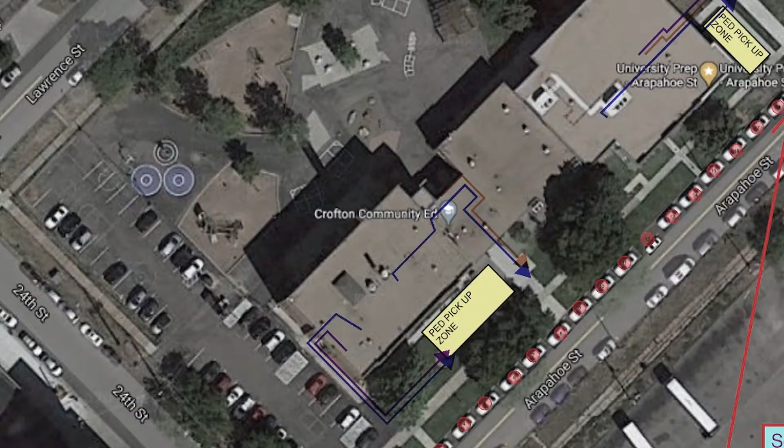I, along with my colleagues John and Adam, participated in Autodesk's 4-part webinar series designed for safety following COVID-19. Session 3, Analysis Focus. In this video, we will cover how we became involved with a local school in trying to help them reopen, what kind of data they typically have available for us to use, what tools we use to evaluate classroom capacity and COVID-19 safe routing, and how we analyzed our design results with Autodesk InfraWorks Mobility Simulations.

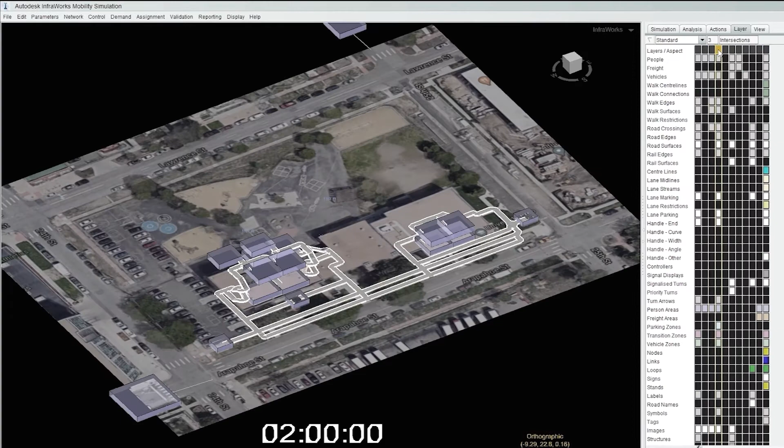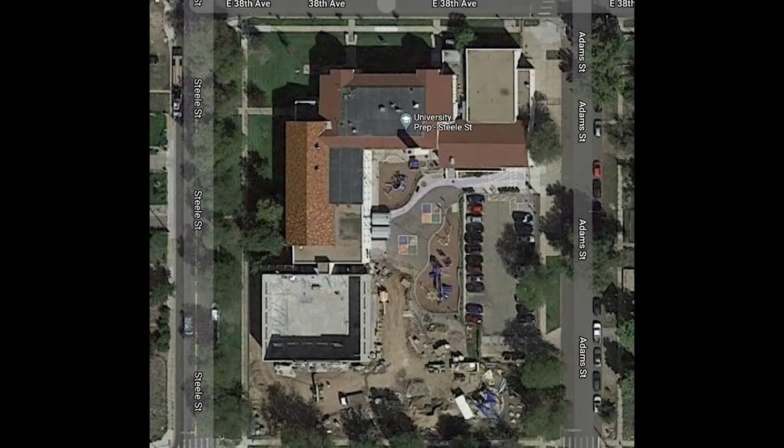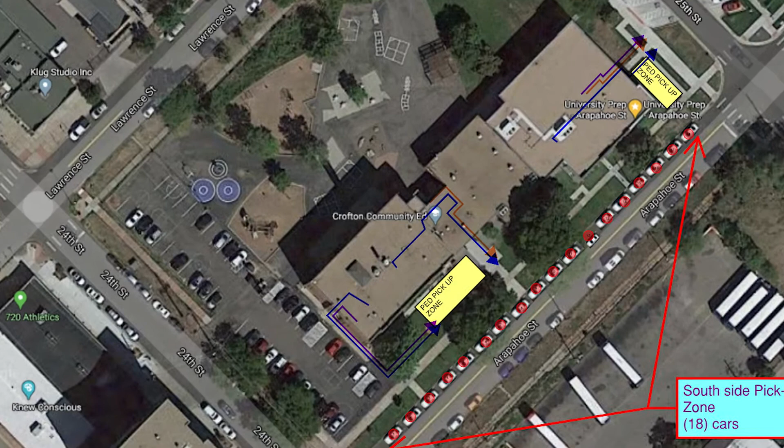VAplus got involved with UPrep out of need, based upon the fact that I'm a parent of a scholar at this elementary school, and quickly recognized that if we did eventually go to in-person with the new COVID social distancing and all the other things in the news, it was going to make dismissals very difficult, and it seemed like it was going to be a little bit of a logistic nightmare. And so I reached out while getting supplies to do virtual, online learning for my son.

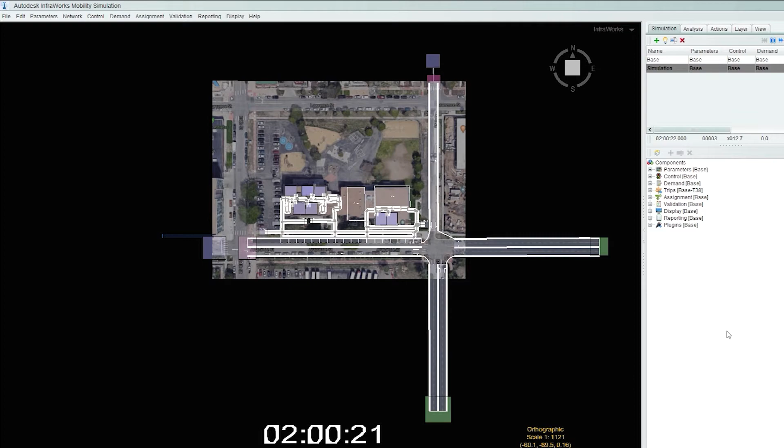I reached out to Alistair, the chief operating officer at UPrep, and requested a meeting with him to go through some of the stuff that we thought we'd be able to do. We had just been introduced to InfraWorks and Mobility Simulation, and it felt like it would be a great way to take some of our other COVID social distancing tools that we had developed and be able to prove and demonstrate that the solutions were workable and fine-tune stuff without experimenting on students.

We quickly ran into some interesting challenges to overcome. A few of them being that there were a bunch of different transportation modes to take on. They have buses that had a very limited window. They had pedestrian pickups, and they also had car pickups. And at the Steele Street campus, they had an additional one beyond the Arapahoe campus: they have students that are released and just walk home. So we've got a bunch of different modes to take care of.

They also have limited staff to watch the kids in class, as well as watch for parents coming up to pick up their kids. So they have to walkie-talkie, communicate back and forth. So they couldn't have too many points of entry or dismissal because they wouldn't have enough staff to cover that. Also, just being able to maintain cohort separations. In Colorado, they're doing cohorts where in the elementary schools, they're essentially not mixing these small groups of students to be able to contain outbreaks.

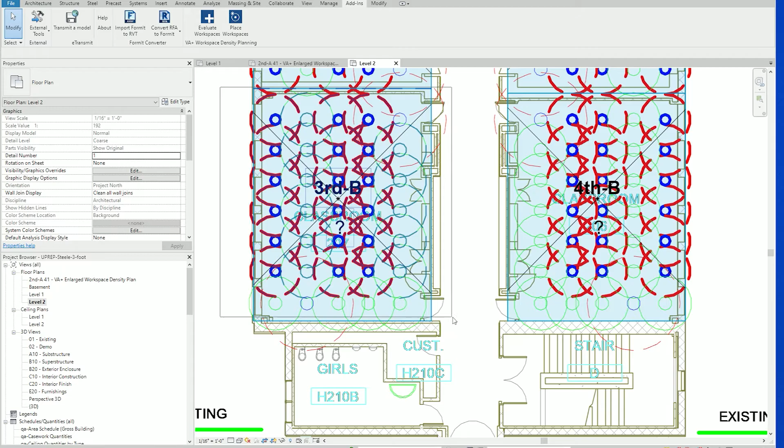So those were all things that we started to deal with and started to use the mobility simulations to prove what we had done: taken PDFs and CAD files, because each campus had a different piece of that, and put them into Revit, used our COVID planning tool to do some spacing. In one case, we did a manual operation where we were able to lay out some classrooms. And we've also taken advantage of the generative design tools to give them more options, understanding where the display or chalkboard wall is versus student circulation and teacher circulation.

We've gone back and forth a couple different times with this now, and the response has been pretty amazing as far as them being able to see how things are working. I think it gives them quite a bit more confidence that they can focus on the little details to make sure that this is implemented safely and see problems that they probably wouldn't be able to see if I just showed them sketches or plans of the routing. Obviously being able to show, here's how you need to lay out your classroom, is quite helpful. And also, this is how you need to operate your one-way routing to keep cohorts from mixing.

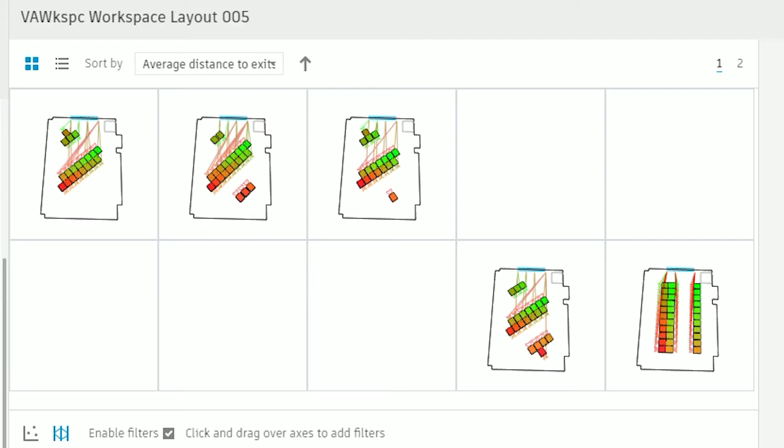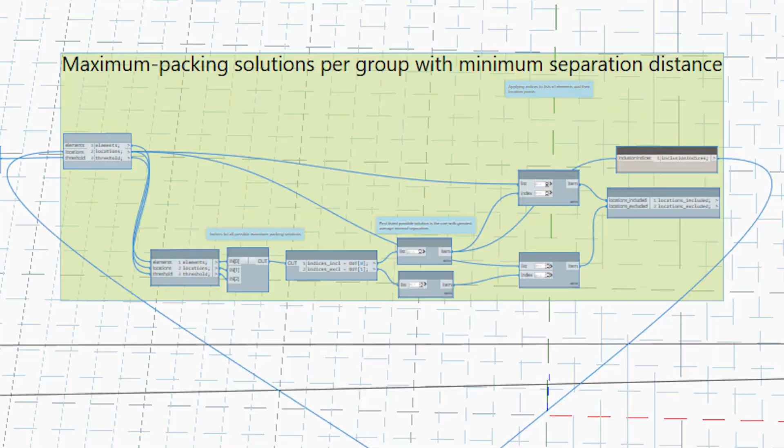Our workflow utilizes the generative design tool in Revit to create new classroom layouts. For this classroom, we will be generating a layout of student desks using a modification of the workspace layout script that comes with Revit's generative design tool. This allows us to explore configurations and find the upper limit of how many student desks can exist in the room while complying with social distancing guidelines.

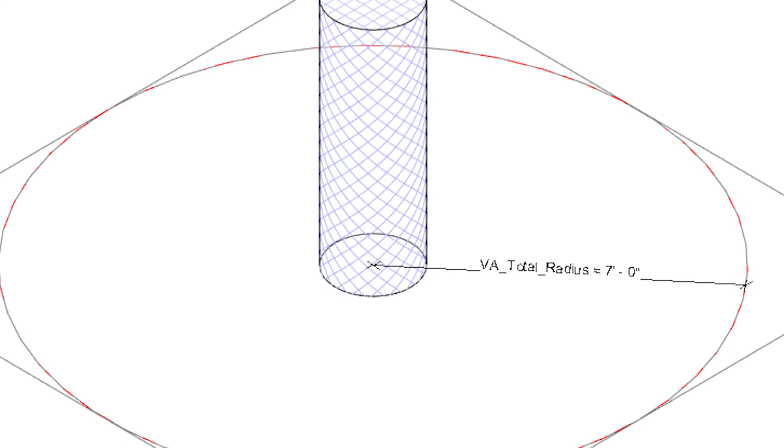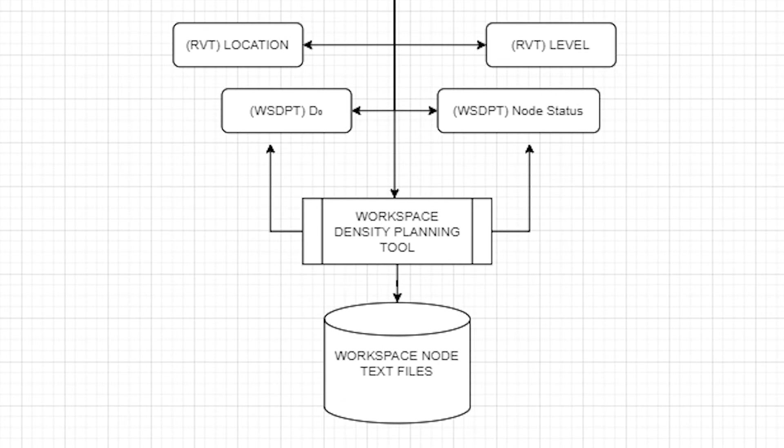We have modified the generative design script to also place our workspace family in addition to station furniture. These workspace families are a representation of an occupancy point, which is common across our workflow and allows both generative and manual placement to have identically accessible, machine-readable results that are managed and reportable through our Workspace Density Planning tool add-in, which also makes this data available for tools outside of Revit in the form of plain text files.

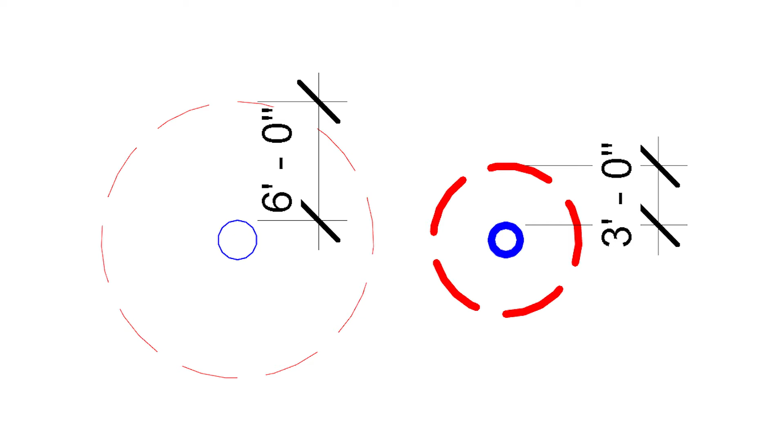In this project's case, the guidelines specify a radius of 3 feet for students and 6 feet for instructors. The social radius and inner human radius of workspace families can be adjusted in the family type, and multiple types can be used to represent different kinds of occupant stations, or to represent circulation nodes.

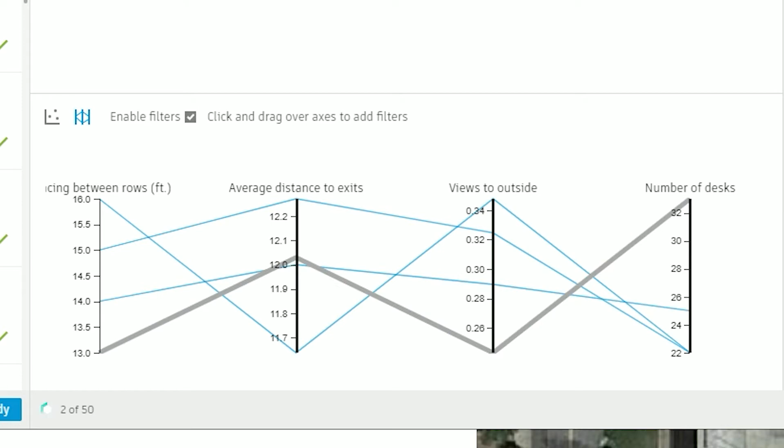Next, we generate layouts in the Revit Generative Design tool. Then select a desirable layout, and Generative Design places our workspace families in the model. A 6-foot radius workspace type is also manually placed to represent the occupancy point for the instructor.

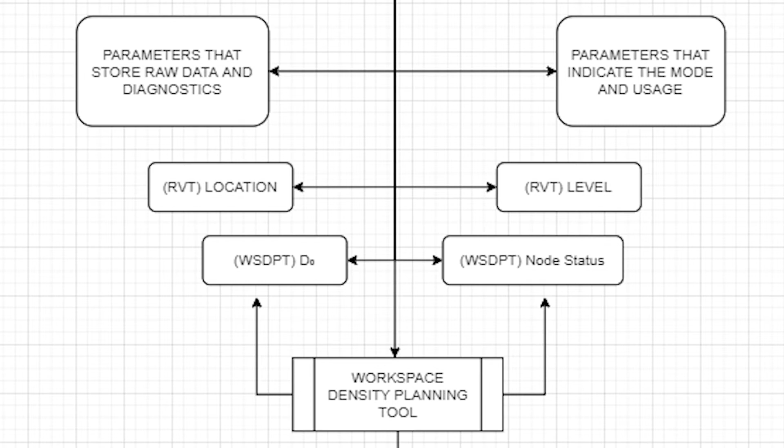But, in order to represent the higher mobility of this role, which must have access to the student workspaces, we will also place circulation nodes, which can be created as a type in the same workspace family by enabling the circulation parameter. This can signal to other tools, such as the Workspace Density Planning tool, other add-ins, or Dynamo scripts, that the instances of this type are to be evaluated as a passage with revolving occupancy which does not count towards occupancy totals of a room.

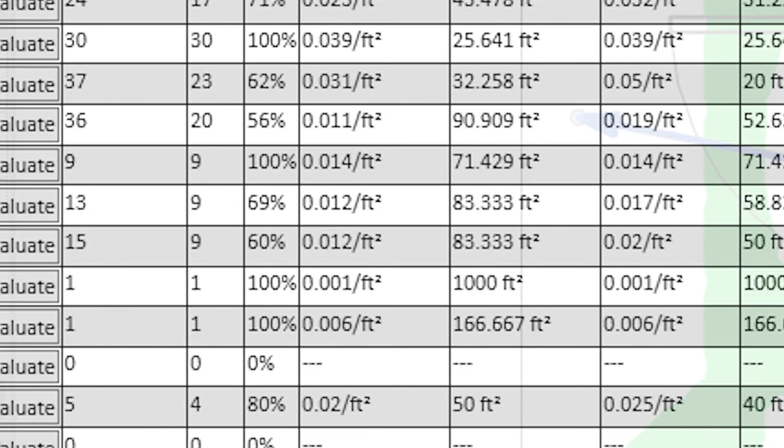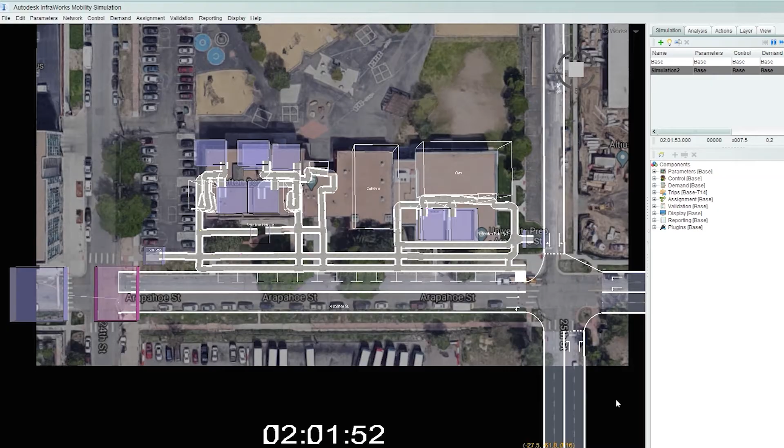Circulation nodes are placed in the aisles created by the Generative Design script's layout, and we run the Workspace Density Planning tool to create a report. This process is performed for all the classrooms at the school. The passing workspace family instances will inform the final occupant counts for each classroom that are used downstream in Infraworks Mobility Simulation in order to create a mobility study.

Mobility Simulator in Autodesk's Infraworks was the perfect tool for us to use to validate our proposal. We were able to simulate our specific dismissal proposal and see if it met our client's goals and COVID-19 guidelines. The tool has enabled our clients to really visualize the dismissal plan and promote a more informed conversation leading to the best solution path.

Benefits of using Mobility Simulator include showing how long dismissal and arrival will take, showing the length of each student trip, showing if social distancing is being met, and representing traffic density at the pickup zone.

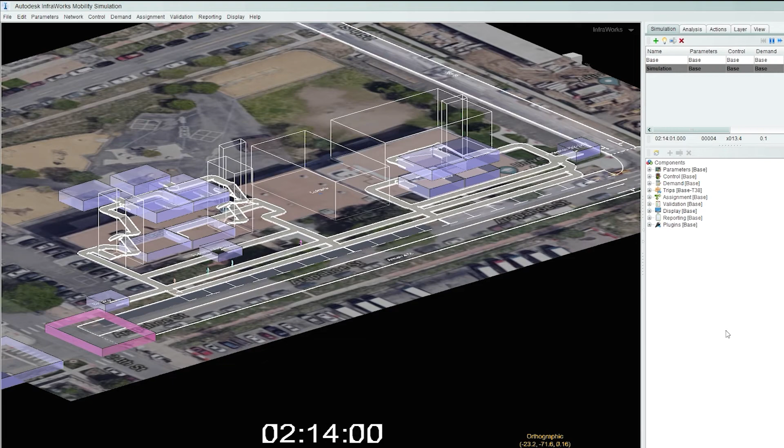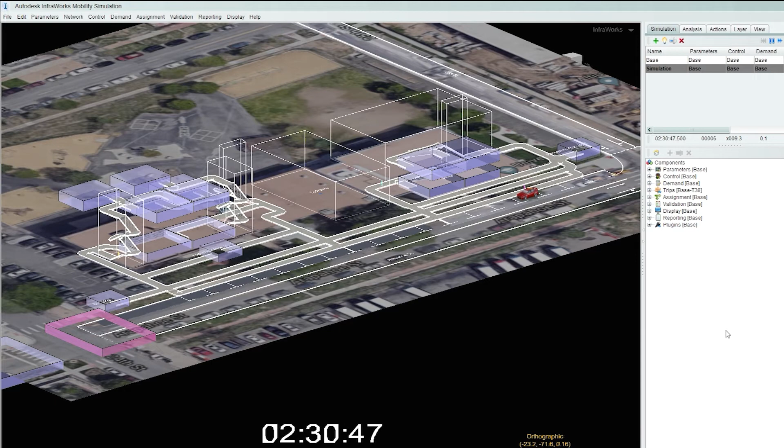Using the dismissal plan PDF outline, a network is created in Mobility Simulator to simulate the dismissal sequence. Classrooms are represented by areas as well as the bus stop and pedestrian pickup zones. This allows us to route students from all classrooms to the bus stop, the pedestrian pickup zones, as well as to the vehicle pickup zone based on real data provided by the school district.

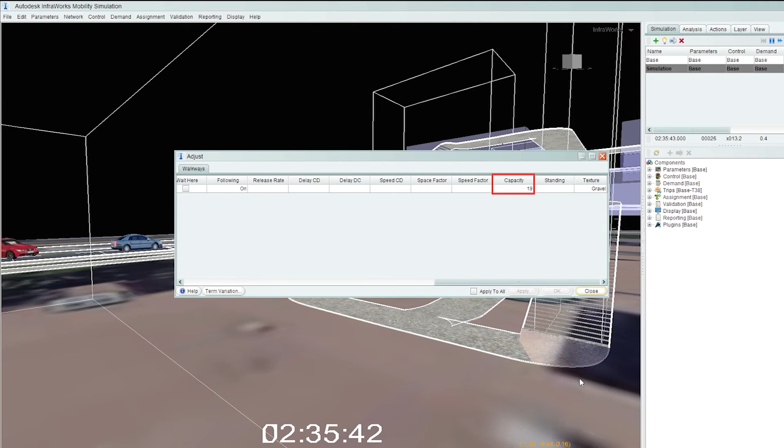Social distancing is simulated by increasing the space parameter for people to the desired social distancing radius, as well as by adjusting the capacity of walkways to equal the length of the walkway divided by the social distance radius. We wanted to show the bus dismissal taking place before the rest of the students' dismissal to reduce the corridor load, so we set up some additional trips and demand profiles allowing us to stagger the dismissal of groups of students.

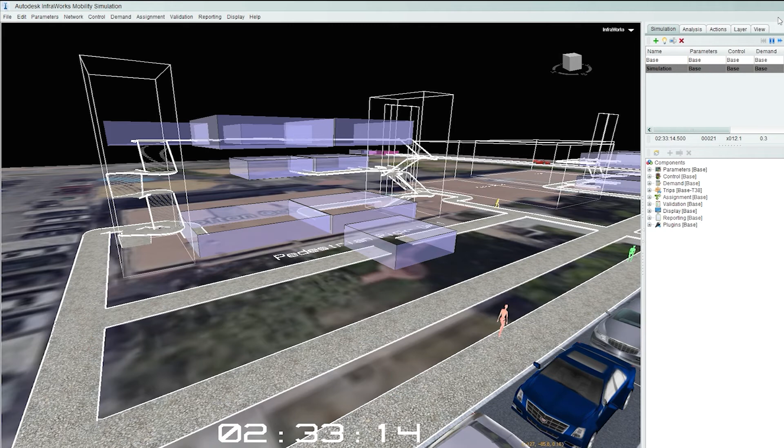Many school layouts will lead to conditions where there are multiple routes which connect destinations. This can be helpful in simulating typical situations where people will randomly make choices, but for our purposes, we want all of the students to follow their dedicated paths, helping avoid collisions. We utilize the route spreading tool to eliminate deviation from the main paths. This tool is also used to test the network and make sure routes are connected and functioning as planned.

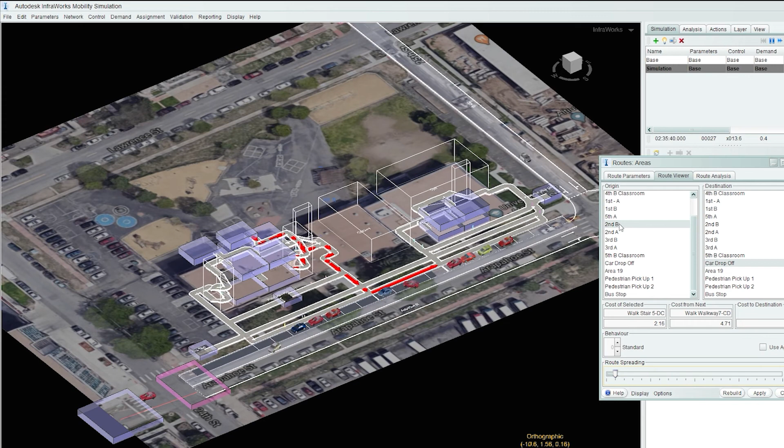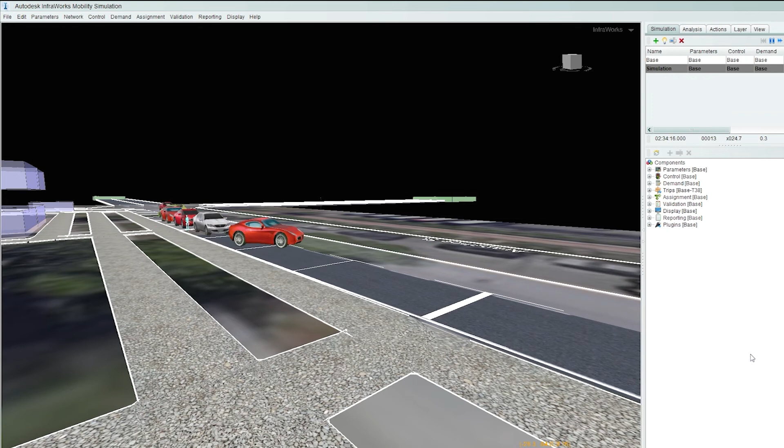We wanted to use the simulation to show the potential impact our plan would have on the vehicle queue for pickup, so we incorporated the vehicle pickup into our simulation. We have a group of cars assigned to fill up the pickup lot over the simulation time. As students arrive in the pickup lot, they will get into a waiting car and leave. We increase the time for the students to get in the car to help simulate additional time that the cars will be waiting in the parking stalls.

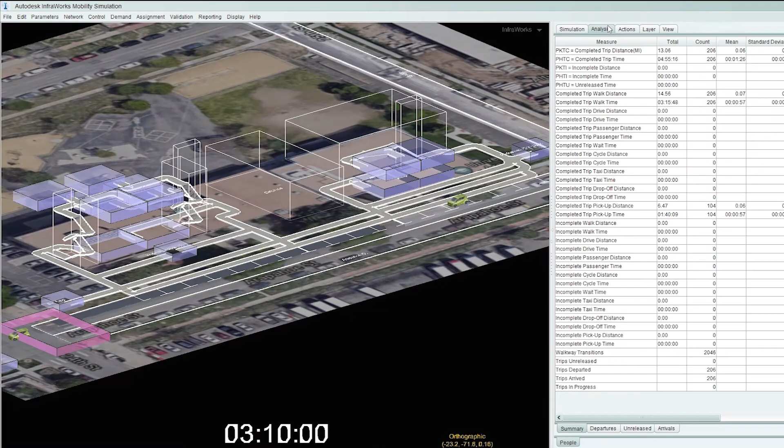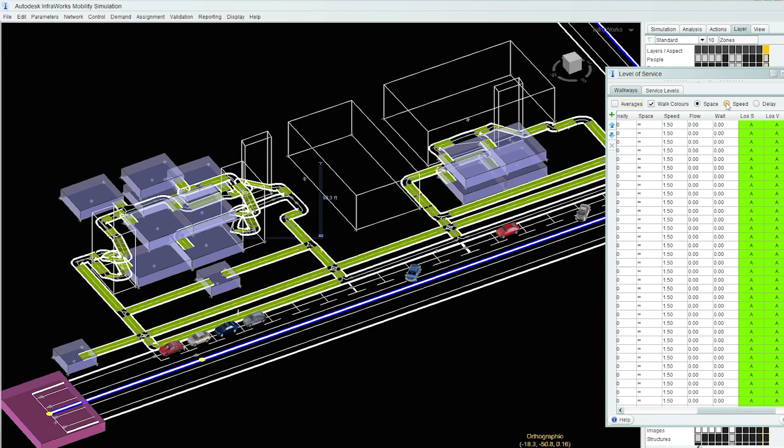To evaluate the simulation, we utilized the information shown in the Analysis tab, which gives a summary of trips with times and distances. We then reviewed the walking reports, which show individual trip times and distances, and the level of service, which shows if the spacing is being met on all walkways. These tools can show that the client's goals are being met and their concerns addressed regarding the time for dismissal and the ability to enforce social distancing.

Mobility Simulator can be used to solve a range of problems related to getting students safely back to school, from arrival sequences and class transition sequences to simulations for middle and high schools, as well as parking and class transition simulations at universities.